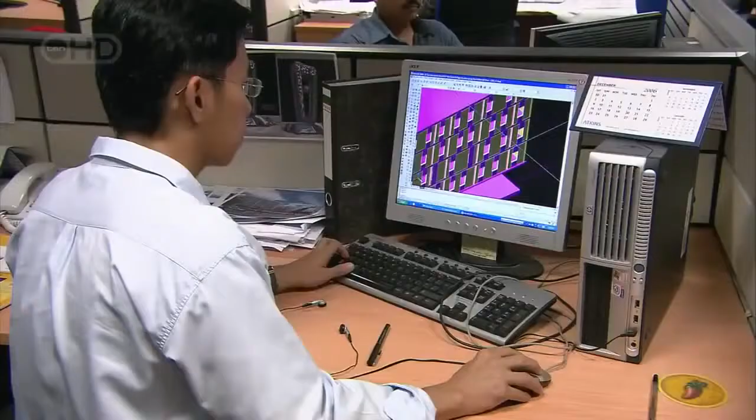The Sheikh's courage is clear from his choice of architects. A radical young team from Britain, brave enough to take up the challenge, but very short on experience. They are led by Chief Architect Tom Wright. We had an average age of 32. Not a grey hair between us. And none of us had gone over about 15 stories. I was quite staggered by the scale and the immensity of the project. Tom Wright and his colleagues have a reputation for innovative engineering, but they're more used to designing schools and offices.

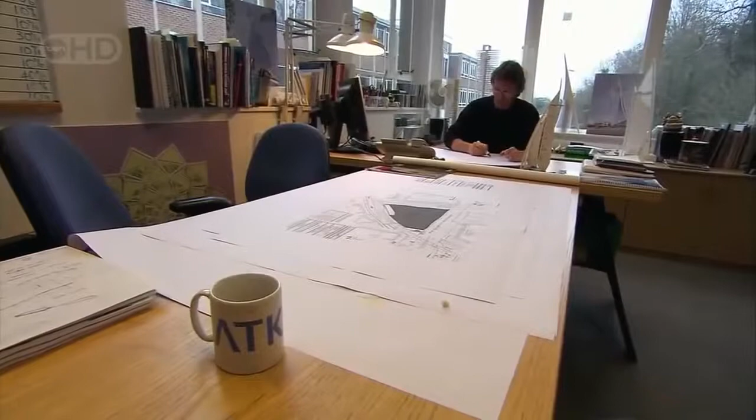But Dubai is a place where connections can make all the difference. Through a contact in the ruler's office, the team gets its break. Sheikh Mohammed agrees to a meeting and is so impressed with their initial concepts, he awards them the contract. Now Wright must turn his sketches into a design so remarkable, the building becomes a world-renowned landmark. We had many sleepless nights worrying that the building we'd designed wouldn't turn out to be at all iconic. Wright knows he must push his design to the limits.

A building only becomes an icon when its form is simple but unique. We decided that if you could draw a building simply with a few strokes of a pen, and it was instantly recognizable as not only the building, but the place, Dubai in this case, you'd created something that was iconic. So if you consider these buildings in the world, there are probably no more than 10 maximum that have actually achieved this status. Australia, Sydney Opera House. As with all these buildings, it's usually just the first couple of lines that actually make you know exactly where the building is. Paris. And you have to put a flag on the top.

Can Tom Wright and his team compete with the likes of Gustave Eiffel? This is a once-in-a-lifetime challenge. All the brainstorming pays off when Wright finally has his eureka moment. We were sitting there having a beer, watching the modern sailing yacht come out of the Dubai Offshore Sailing Club. You think of excitement, you think of exhilaration, and we went, hey, this must be the one. The form we came up with is very simple, and within a few lines, I think you can see that it has all the elements of an iconic building. It's simple and instantly recognizable.

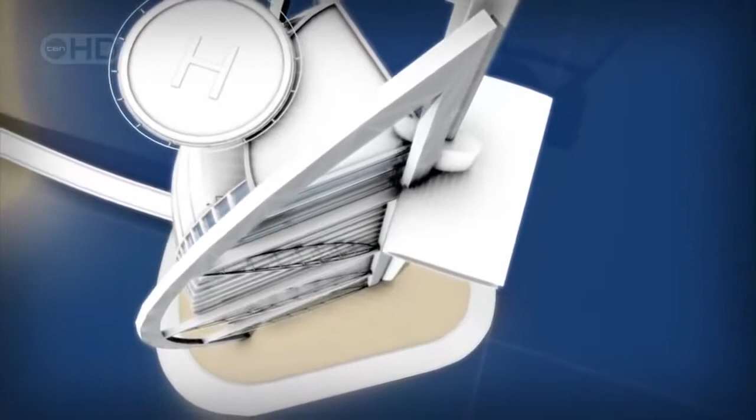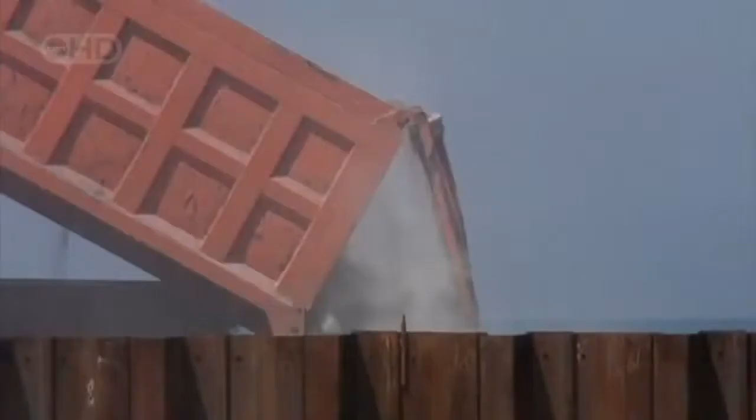By early 1995, the construction team is hard at work on Phase 1, building a low-lying island. But the inexperienced architects are about to get a taste of Dubai's extreme weather. April the 27th, a powerful storm known as a shamal sweeps across the Gulf, hitting the coast with a vengeance. A set of construction barges lie in its path. Each is laden with 10,000 tons of rock. The architects have planned for all weather conditions, but the storm's intensity still shocks Simon Crisp. We had 3 or 4 metre waves bashing onto the beach. To see the waves coming in like this was really quite a wake-up call for us.

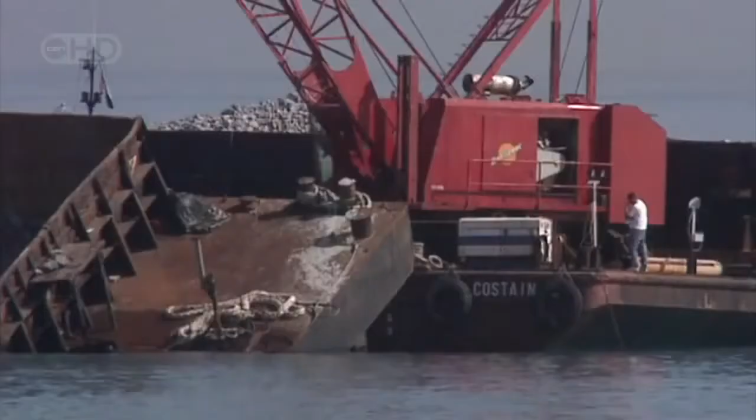One huge barge breaks loose and slams into the mainland. The team realizes the damage this kind of storm could inflict on their island hotel. We had a really graphic example of how powerful the Gulf of Arabia can be when it's angry. The architect's decision to expose their structure to these forces could have serious consequences. The engineers will have to struggle to produce a low-lying island capable of resisting nature's fury.

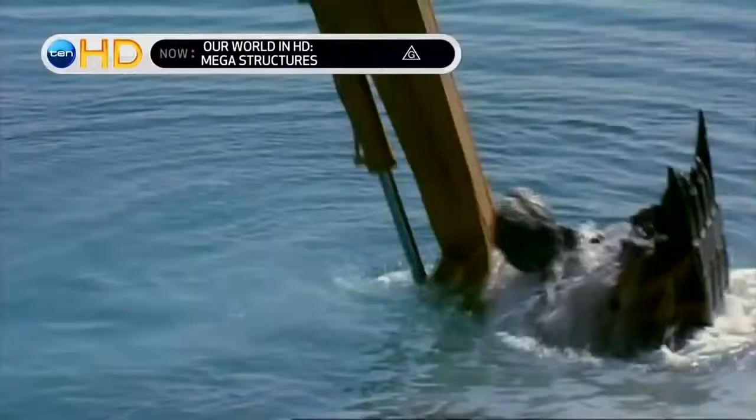The man-made island for the world's tallest hotel has hit a critical stage just 5 months into the build. Dubai's Sheikh Mohammed is depending on this project, the Burj Al Arab, to convert his country from oil producer to top-class tourist destination. But a debate rages over the island's height. Architect Tom Wright wants to make it low to give the impression of a sail rising out of the water. We argued a lot about the height of the island. From a design point of view, I wanted people to be close to the sea.

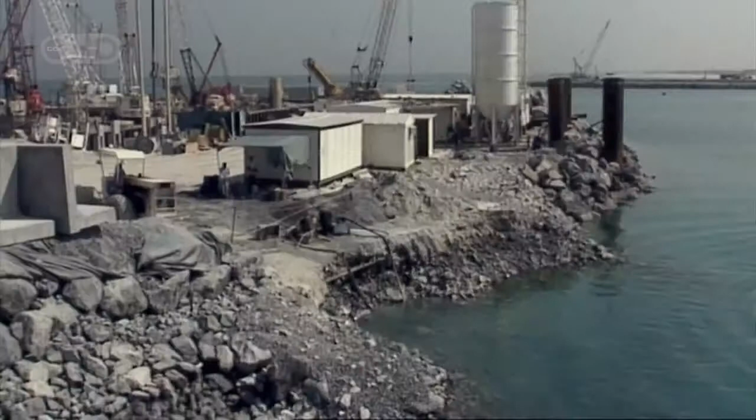From the start, he's gone head-to-head with engineer Mike McNicholas, who's responsible for the island's safety. So I wanted the island as low as you possibly could, skimming the sea. I'm coming from the other end, needed to make sure we were protecting the island. McNicholas's worst fear is that waves breaking over the island could damage the hotel or even drag guests into the sea. Initially, the engineers planned to build the island using rocks. They are available locally and the technology is proven. But Wright rejects this. A rock island would have to be far too large to repel the sea safely.

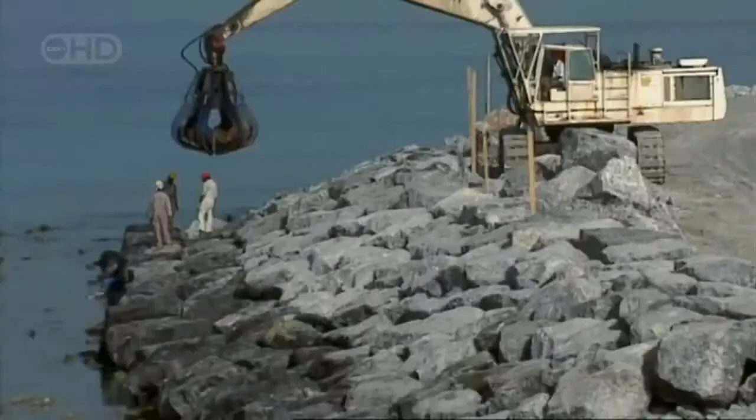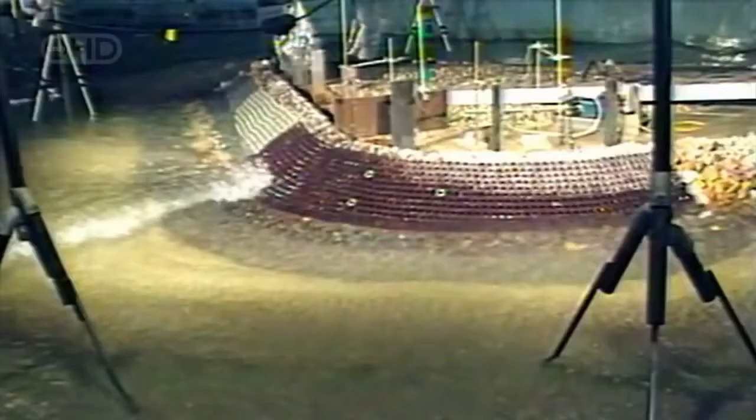To keep the island low, McNicholas experiments with pioneering concrete blocks designed to reduce the impact of waves. But no one in the Gulf has ever used these blocks before. I had to insist with the team that we carried out tank testing. It was the only way we were going to be sure that the island would be safe. These tests replicate the power of the tallest waves that can occur once in 100 years and send them crashing into a series of differently configured models. 3 weeks of testing prove the hollow blocks will work.

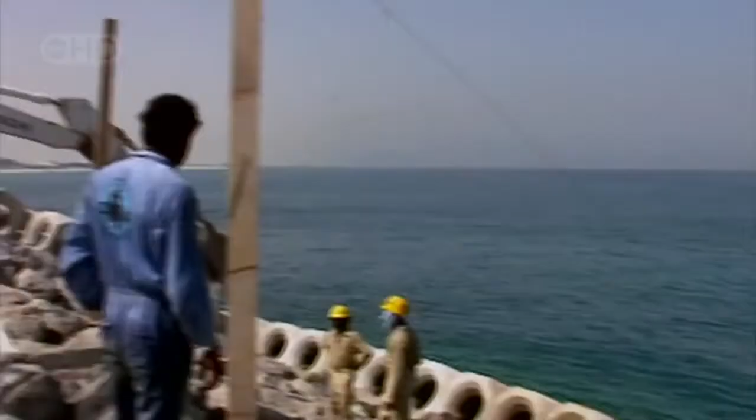The construction team builds the island with steep rock slopes, then covers them in concrete armor to absorb the force of the waves. These ingenious blocks work like a sponge. As the wave hits, the water passes inside the space and turns around on itself. The force is largely dissipated. With the engineers' help, architect Tom Wright has won his battle for a secure island that rises only 7.5 meters above the waves. Now the team begins the second stage of construction.

In the center of the island, construction workers drive huge lengths of steel 20 meters into the ground. This creates a triangular steel wall known as a cofferdam, which will become the outside of the hotel basement once they excavate the sand from inside.

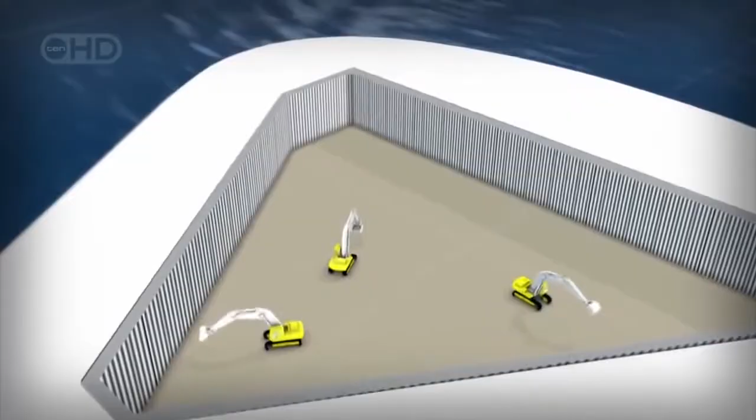But removing the sand could be dangerous. That was a real challenge for us. It's sleepless days and nights, 7 days a week. How we were going to stop the seawater coming into the structure, how we were going to stop the seawater coming around our structure from beneath and flooding it.

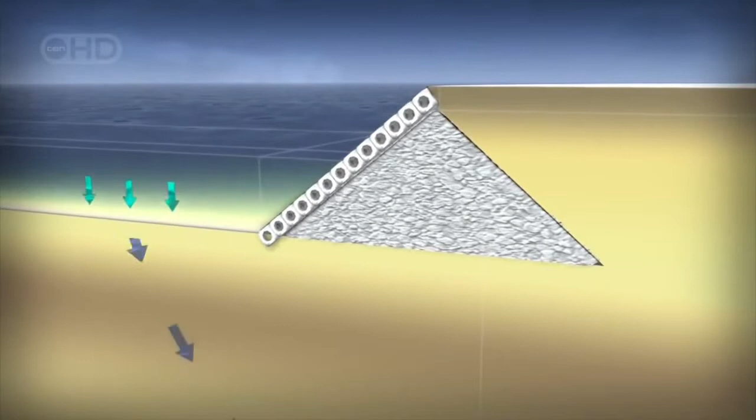The weight of the sea is a huge force on its bed. This pressure forces water through the sand and threatens to flood the artificial island from beneath. To keep the sea out, McNicholas injects liquid cement into the sand to seal off his steel wall from below. But as the sand is removed to form the basement, there's less and less weight to hold back the force of the sea. The cement seal is going to be tested to the limit.

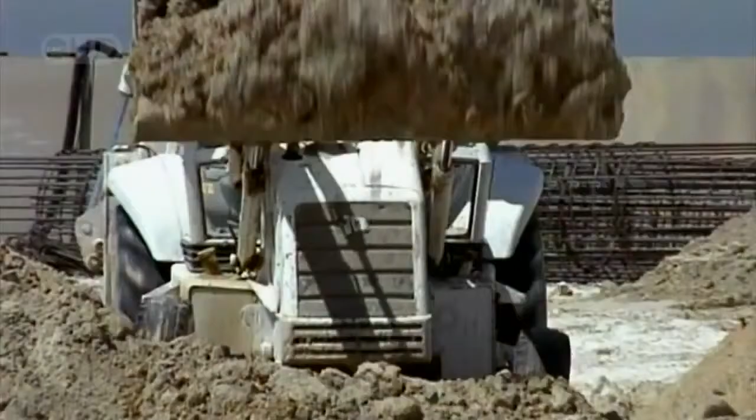In the worst case, the pressure caused by that water movement could have blown the whole bottom of the excavation like a champagne cork. If McNicholas's calculations are wrong, the excavation could be swamped, killing hundreds of workers. But he stands by his design. With the cement seal in place, the excavators begin to remove the sand.

As the man responsible, he's not going to let the workers face the risk alone. I felt I had to be one of the first guys down at the bottom of the excavation, looking up 10 meters above myself, thinking, each side of this cofferdam is 7,500 tons of sea pressure pushing in. When put to the test, both wall and seal hold firm.

And one of the probably proudest moments of my career was being stood on that excavation and looking around and seeing the steel wall there surrounding me and thinking, we are holding back the sea. My design worked.

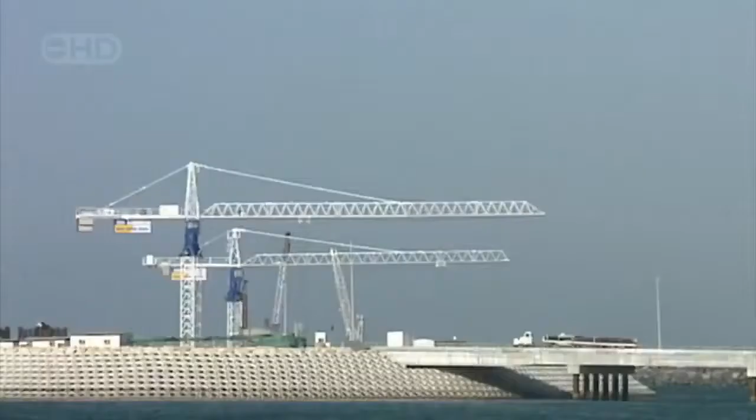November 1995. The artificial island for the tallest all-suite hotel in the world is now complete. The construction team starts phase 3 of this one-off project, the foundations. The support needed for any skyscraper is vast. But the location of the Burj Al Arab presents an added challenge. It had never been done before to build something like this on reclaimed land. I mean, we're talking about a 300-metre high tower on a man-made island in 6 metres of the Arabian Gulf.

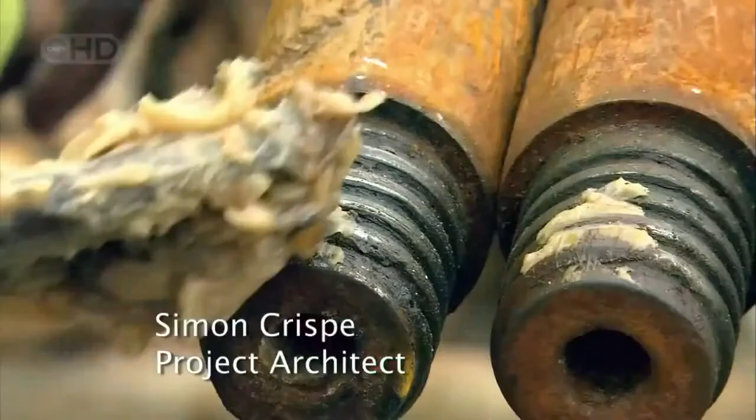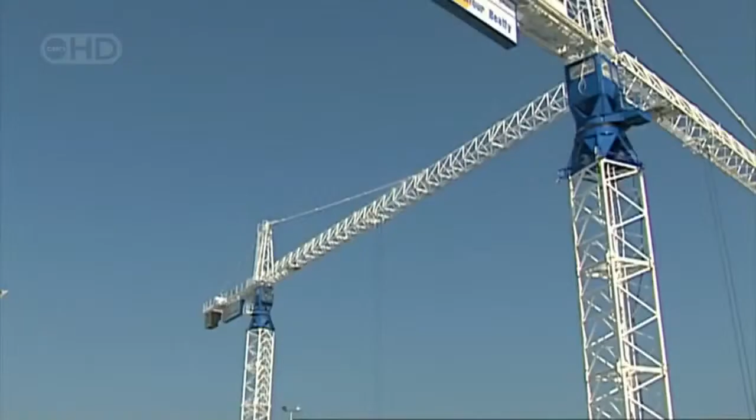The problems multiply when the results of earlier core tests reveal bad news. The team searching for bedrock drilled deep into the seabed. But even a full 180 metres down, there was no solid rock. This will make their job tougher, but the architects remain defiant. The average person would think we're crazy to build something like this on sand, let alone out in the water. How will this 300-metre structure stand firm against earthquakes and winds of close to 150 kilometres an hour when its foundations depend on nothing more substantial than sand?

On an artificial island 270 metres off the coast of Dubai, construction workers are preparing the ground for the tallest hotel in the world, the Burj Al Arab. But there's no bedrock beneath the site to support the foundations for a skyscraper. The architects have a plan. They want to support the Burj using steel-reinforced concrete foundation piles drilled deep into the sand.

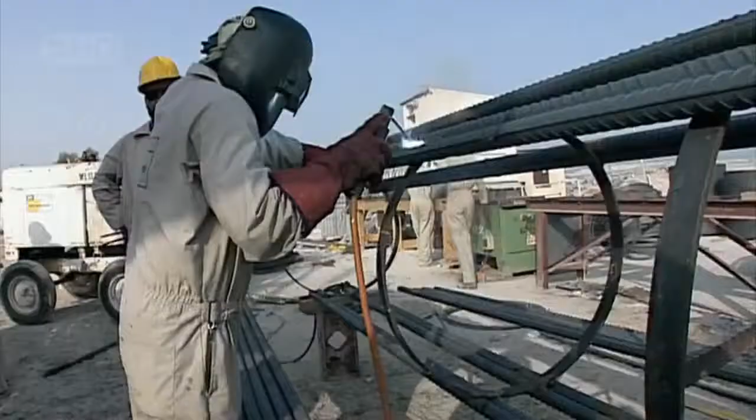So, what's to stop the whole structure from just sinking? They are relying on an effect known as skin friction, the resistance that stops two rough surfaces slipping past each other. Skin friction is all about the contact between the sand and the surface of the pile. And the longer the pile, the further in the ground it is, the greater that effect. And I'm going to demonstrate it now by whacking it in.

You'll see it starts to move quite quickly with the first few impacts. Now it's starting to stiffen up a bit, even though I'm not hitting it any harder or any softer, and the skin effect is starting to really kick in here. Once the friction between the post and the sand around it equals the load of the hammer, the post comes to a halt.

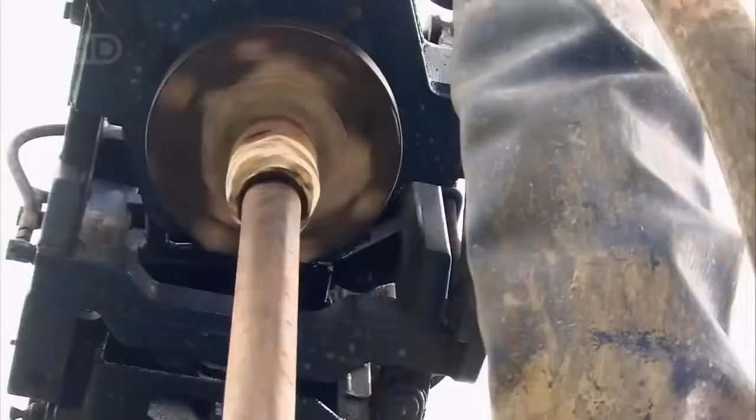The scheme will only anchor the Burj if the sand is compacted enough to create resistance around the building's piles. The drillers pack sand samples into sealed containers and send them off to be analysed. If the results show the sand is too loose, then support on the piles anchoring the building could suddenly fail.

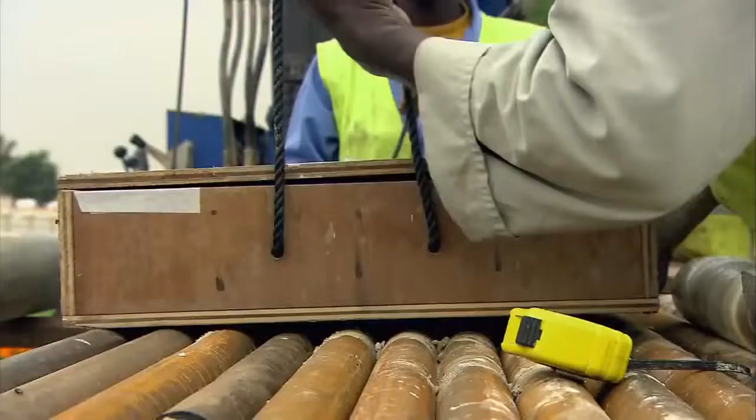The geography of Dubai gives everyone reason for concern. It lies within range of a major fault line, so this soaring megastructure could be vulnerable to earthquakes.

In June 1964, a 7.5 magnitude earthquake hits Niigata in northern Japan. Because the area is built on sandy silt, the tremors flip over entire apartment buildings. This isn't normal earthquake collapse. It's a devastating phenomenon known as liquefaction.

As grains of loose sand shake, they fill up any air pockets and compact, taking up less space. The ground stops behaving like solid earth and acts like a liquid. On shifting sand, any building could simply topple.

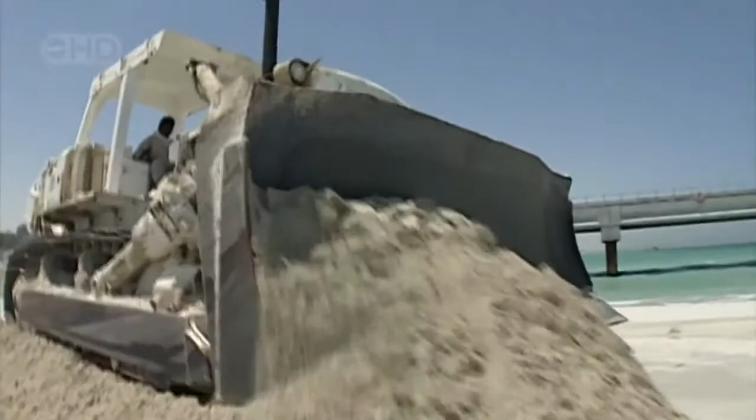When the results of the drilling tests return, it's good news. Deep beneath the site, they find compacted and calcified sand. Liquefaction is not a threat. But will the foundations be long enough for the skin friction to hold them firm? We weren't going to take any chances, and we extended the piles by another 8 metres.

CRISP specifies foundations over 20% longer than originally planned. These 250 concrete piles have a combined length of 10 kilometres, 35 times as long as the towering hotel they will support.

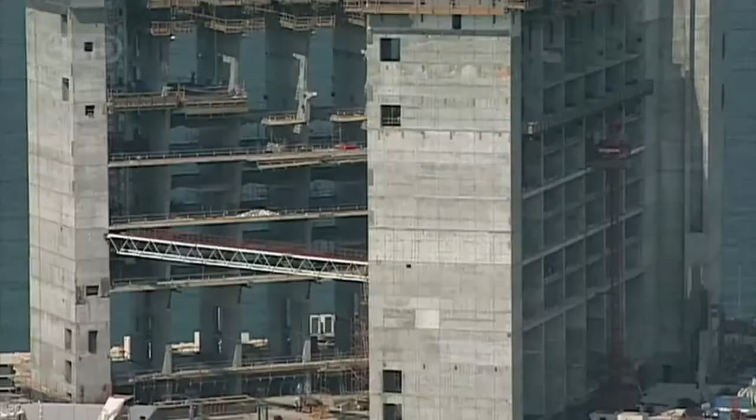One by one, the engineers are solving the challenges thrown up by this extraordinary structure. But in 1996, they brace themselves for a new set of obstacles as Phase 4, the construction of the hotel itself, begins. This building had to stand up to the worst that the Gulf could throw at it. The hotel itself has slender concrete walls, not capable of withstanding the elements alone.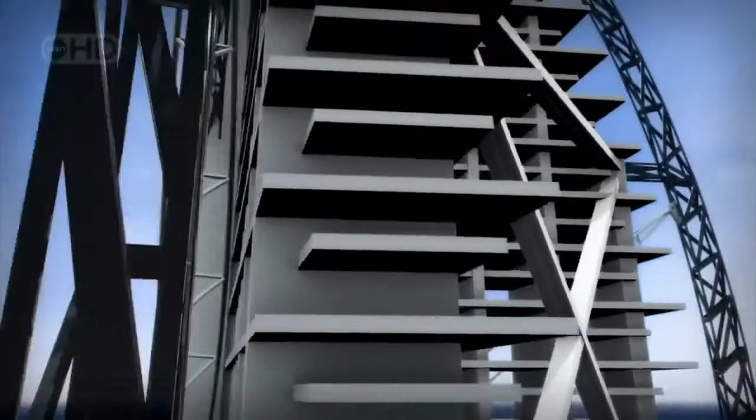To hold them firm against high winds and earthquakes, the architect devises a visually stunning solution. A gigantic steel structure outside the main building, known as an exoskeleton. A series of vast diagonal trusses tie two huge steel bows to the concrete core at the back of the building. Wright's design will make the building unique.

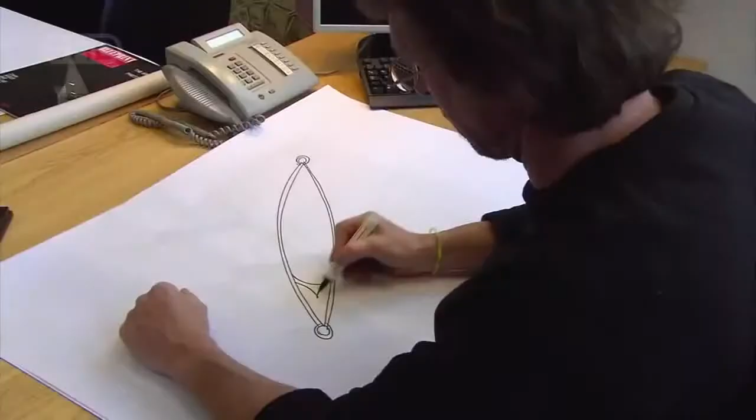But his giant diagonal trusses will make life hell for Anthony McCarter, the engineer who has to make them work. Those trusses gave me 4 months of heartache, sleepless nights, worries, anxiety. They must be incredibly strong to tie the exoskeleton together. But aesthetics are just as vital. It was critical that these diagonals were very, very elegant and also very beautiful as they're so visible.

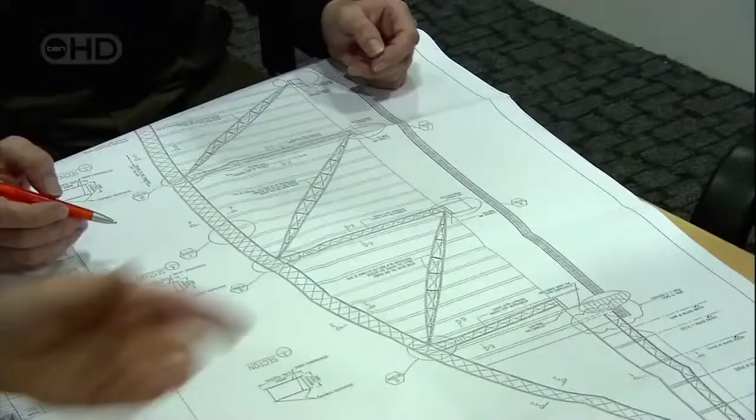This building has to wow the world and make Dubai a must-stop destination. Wright's not about to compromise. I used to go to Tom with option after option. I remember one particular occasion where I had 7 options and he went, no, no good, no good, no good. Eventually, McCarter finds a form that works structurally and is graceful enough to fit Wright's vision.

But this in turn causes nightmares for Malcolm Murphy, the chief contractor. It's okay for the architect to draw pretty pictures, but we have to build it. He finds a factory just 15 kilometers from the construction site capable of welding the huge diagonals. Each one is longer than the Airbus A380 Super Jumbo and heavier than 20 double-decker buses.

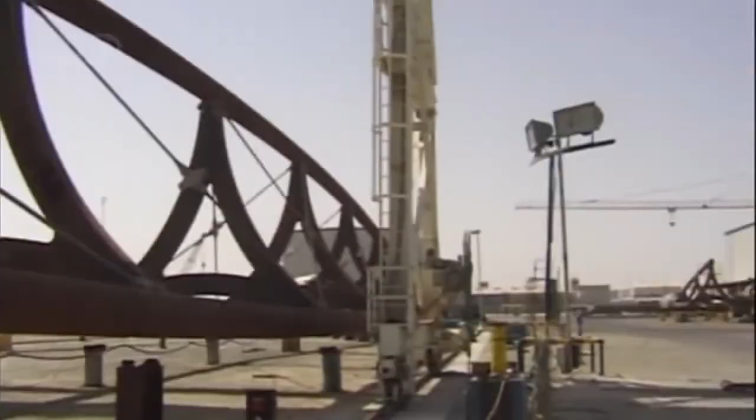Welding these complex forms in the factory is the easy part. Transporting them to the site is not. With each truss weighing in at 165 tons and reaching a staggering 85 meters in length, it's no easy task. And the challenge is to do that. It's just unbelievable. No one has ever transported anything this size before in Dubai. But Murphy's not going to be beaten.

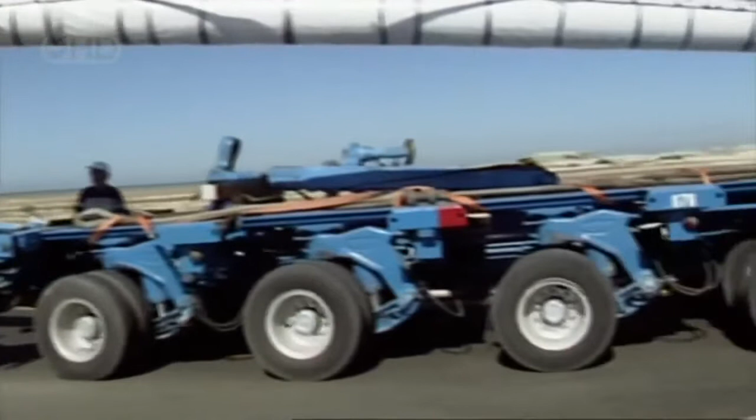He brings in one of the world's largest heavy lift transporters, a beast with a total of 80 wheels. It makes the slow journey to the construction site at an average speed of around 6 kilometers an hour. Police must close roads and remove traffic lights to allow this convoy through. When they finally reach the site, the contractors face their next hurdle. These 165-ton beasts have to be lifted into position.

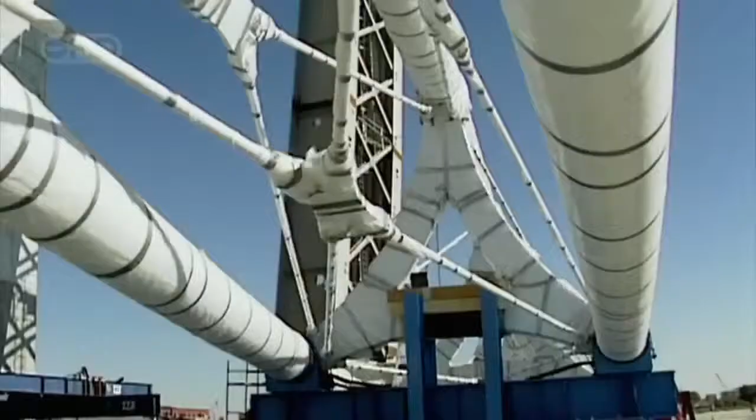The architect refuses point blank to position these things in 3 pieces, which we wanted to do originally. And he said, no, aesthetics, I'll not let you weld up there. He has to find a way to lift the trusses in a single piece to a height of almost 200 meters, twice the height of the Statue of Liberty. We had to go away and think of an idea how to actually lift these monsters up. We had 3 big monster cranes in there, and even they weren't big enough to lift the diagonal trusses.

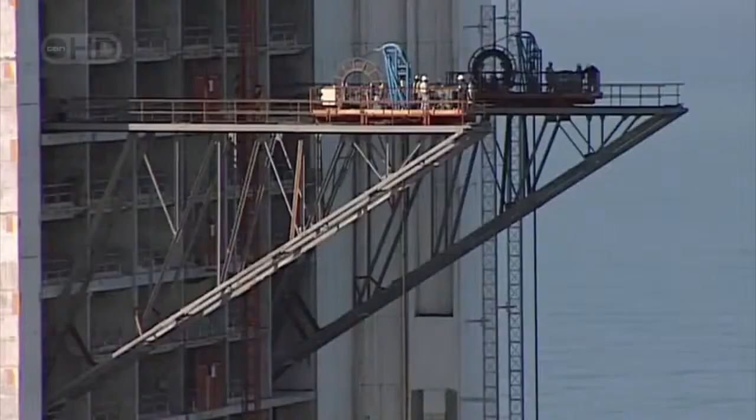Murphy must look further afield for a solution and brings in specialist lifting gear from Singapore. His team sets up winches, like those used on offshore drilling rigs, high on cantilever frames 15 meters from the building. Cables with a breaking strength of 225 tons are attached to the end of the truss. I can assure you we were very, very nervous that morning when we lifted the first one. 30, 40 guys had sleepless nights that week, getting ready for that first lift.

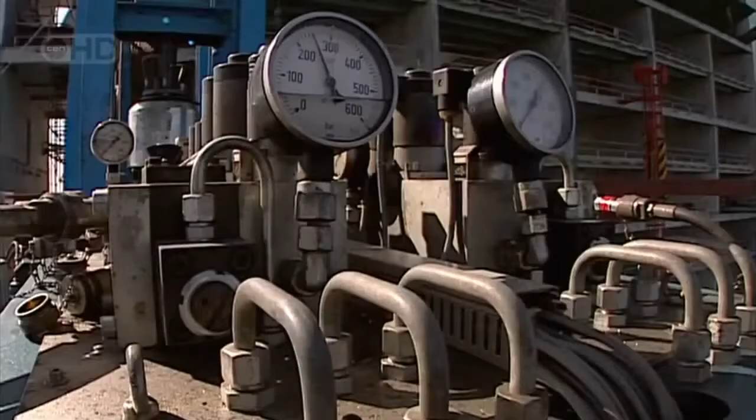The 2 massive winches take up the strain and then painstakingly raise the diagonal truss little by little up the side of the building. It's all going to plan. Murphy and his team have solved the lifting dilemma, but these trusses have a sting in the tail. They need to fit into place with pinpoint accuracy. But Dubai's climate means temperatures can vary by as much as 14 degrees in a single day, and this will make the trusses expand and contract dramatically. The problem's known as thermal expansion.

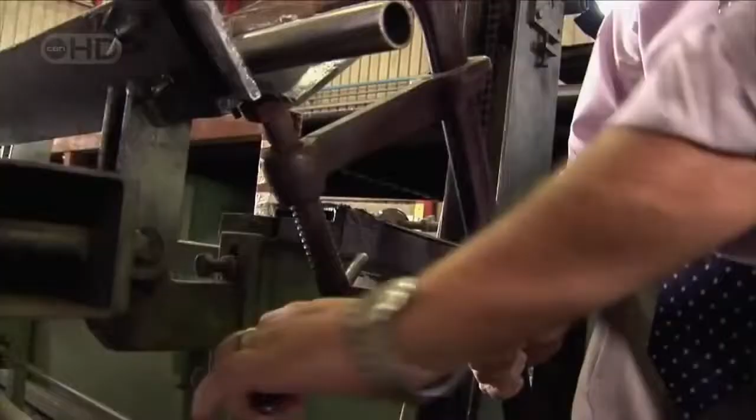The steelman's nightmare in the desert, working 50 degrees C. Steel expands in the heat and contracts when cold. Okay, chaps, light up. We're actually going to heat the steel up now, which is going to give you an idea of what temperatures we're working in the desert.

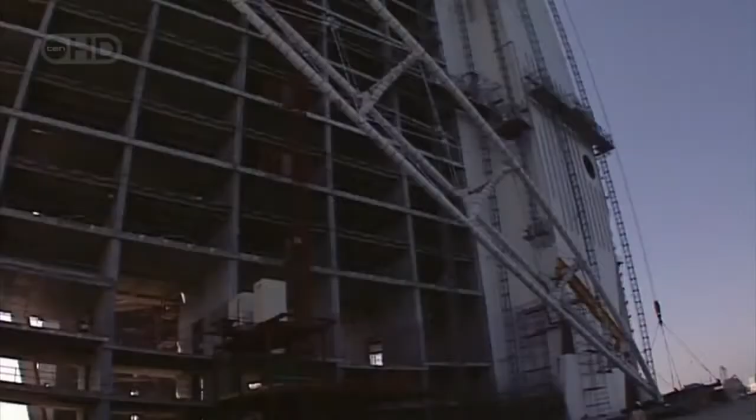Heat makes the steel molecules move faster and further. And this 15-meter tube actually grows in length. The difference is visible. What did I tell you? Steel does expand with the heat. The diagonal trusses on the Burj Al Arab could expand and contract by a full 5 centimeters over a 24-hour period.

They will never fit their precise point in the framework without an ingenious solution. The engineers thought about it, the structural fabricators, the steel fabricators, the architects, everybody thought about it, and it was actually one of the architects came up with this great solution. On the frame of the structure, the fixing bracket contains a vast washer with its hole offset from the center. This swivels until it lines up with the hole in the diagonal truss.

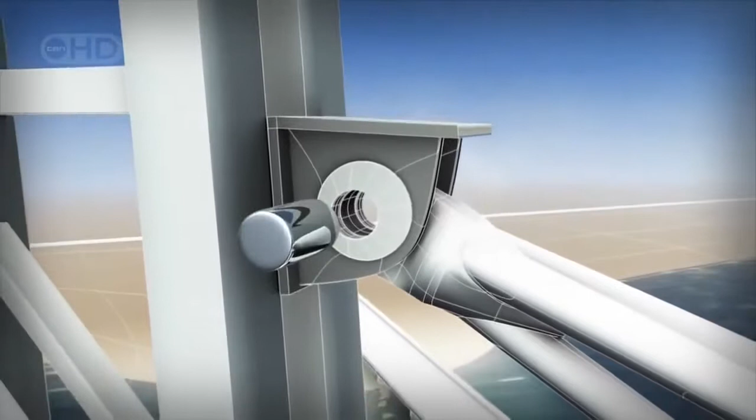Then, the cast steel pin, about 30 centimeters in diameter, is inserted through both holes, locking them together. This clever device buys the team the crucial 5 centimeters of play they require for the installation, and the truss is now fixed securely in place. When we got that pin in, we had those champagne corks flying. It was just unbelievable. But there's precious little time for celebration.

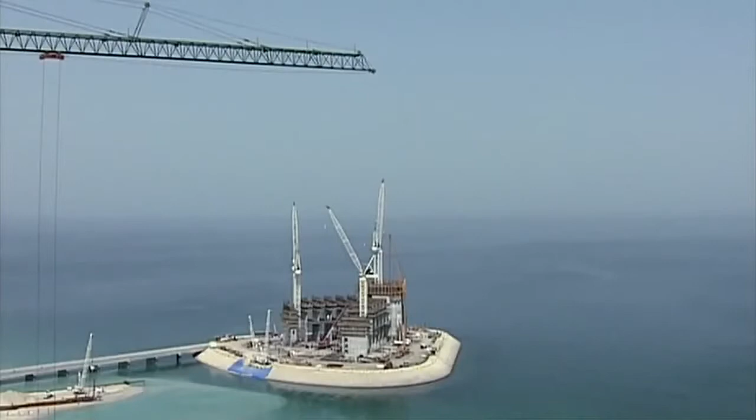The first VIP guests will arrive before the millennium. This leaves the team less than 36 months to complete the entire project. Sheikh Mohammed's vision for the Burj Al Arab meant that it was needed yesterday. January 1997. A colossus is emerging out of the Arabian Gulf. The Burj Al Arab is to be the tallest hotel in the world, the last word in luxury and a proud symbol for Dubai.

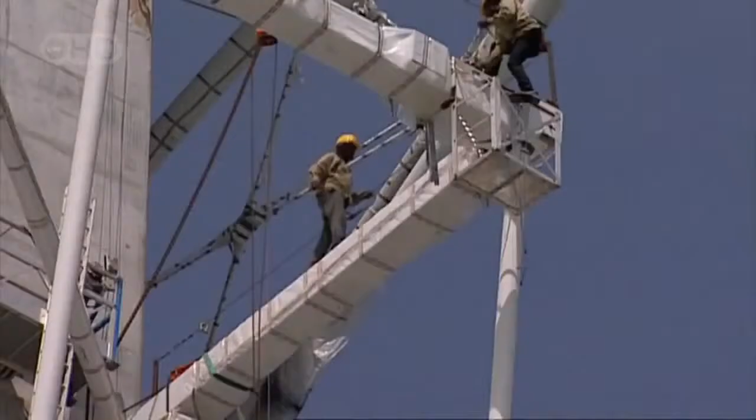Architect Tom Wright wants the building to be beautiful. The steel sections of the exoskeleton that will support it must be as minimal as possible. The view from these $2,000 a night suites will have to live up to the price tag. When you're in the suite, looking through the windows, they are right in front of you, so they have to be exceptionally well detailed and well put together.

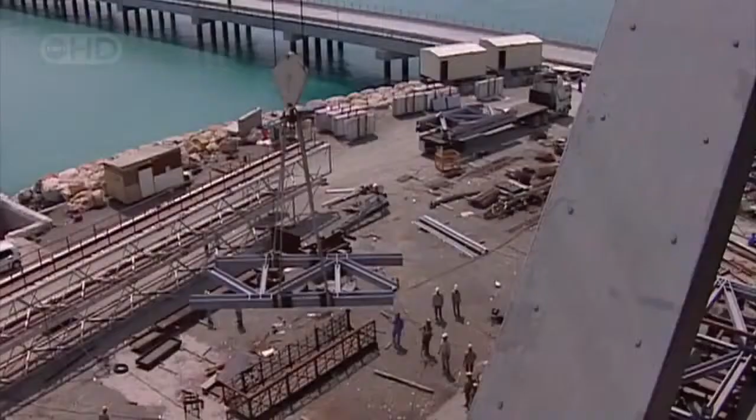But this creates a dilemma. If Wright makes the exoskeleton too light, the wind's force at 300 meters above the Gulf could shake the building apart. Too bulky, and the elegant form of his sail-shaped structure is ruined. Once again, Wright and the engineers, who must make his hotel safe, are on a collision course. When you're designing a building that is taller than the Eiffel Tower, and you've never done one before, you want to make sure that you've got it right.

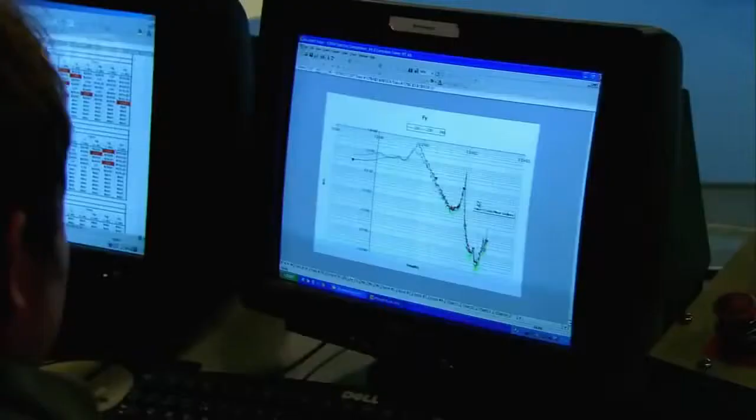This structure is so unusual. For the first time in Dubai's history, engineers decide to do tests in a wind tunnel. Wind engineer Volker Butgereit knows the Burj Al Arab is one of a kind. Before this building came along, most of the buildings in the Gulf were fairly orthodox shape. They were square, they were rectangular, they were nowhere near this scale. So doing a wind tunnel test for a building in those days in the Gulf was almost outrageous. But for this extraordinary structure, it's essential.

The wind tunnel simulates the wind effects of the Gulf around this 1 to 50 scale model. This building has seen some pretty severe loads, almost twice what it would be seen in London. We measured suctions which were the order of a weight of a car hanging off, trying to suck the panel off the building. So that's quite something. The wind tunnel throws up results that could threaten the entire exoskeleton.

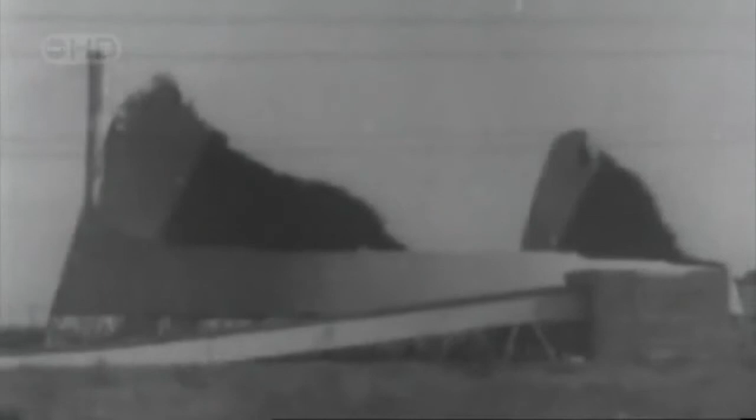When we first saw the design, there was immediate concern about vibration due to something called vortex shedding. Vortex shedding is an engineer's nightmare. Certain wind conditions blowing over sharp edges on the steel structure can create miniature tornadoes. These set up dangerous vibrations that can shake a building to destruction. Which is exactly what happened to these massive cooling towers in Ferrybridge, Northern England, in 1965. The engineers must find a way to protect the Burj Al Arab.

The simplest solution is to change the aerodynamic shape, but that upsets the architect. The architectural idea of the exoskeleton structure is, when you look at it, the very essence of the building. If you take it off, it's just another building. If you put the exoskeleton structure on, you know, you have an icon.

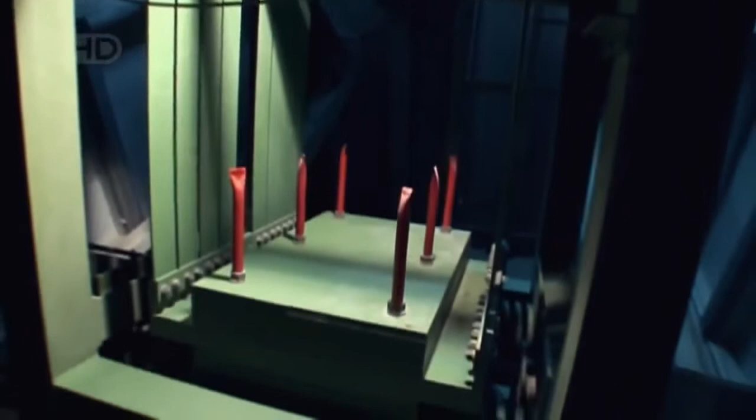The engineers need to think again. This is classic vortex shedding. We realized we had to come up with something clever that was not visible, but somehow reduced the motion. They turn to an ingenious hanging weight called a tuned mass damper. These are installed at vulnerable points in the exoskeleton.

When the wind blows and vortex shedding starts to create dangerous vibrations, the 5-ton weight will swing instead of the structure and damp down the vibrations to well within safety limits. 11 of these systems are fitted from the top of the 60-meter mast all the way down through each of the steel bow structures. These dampers safely cancel out the threat.

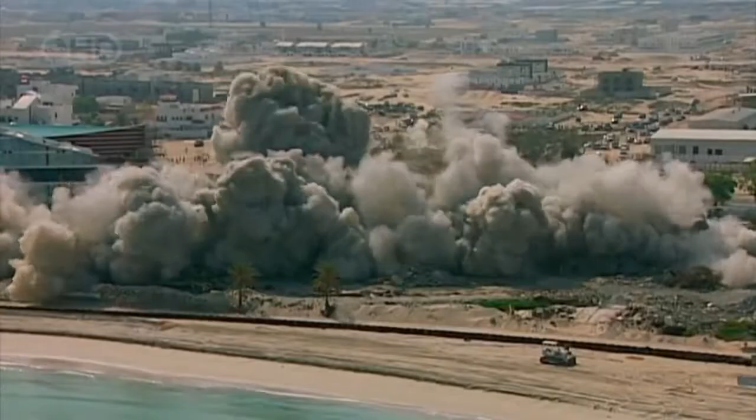June 1997. Dubai is reinventing itself as the luxury tourist destination. This old hotel bites the dust as the Burj Al Arab, the symbol of the new Dubai, approaches its final form. Just 30 months before the deadline, the crew begins constructing the toughest engineering challenge. Sheikh Mohammed wants the building to amaze. So the design calls for a restaurant that looks as if it's suspended in the sky.

I like the idea of the visitor sitting out in space, looking across the view towards the Arabian Gulf and Dubai, and sort of almost floating up in the clouds. The whole idea of hanging out over space would give you a dining experience pretty unparalleled. The Al Muntaha, or Ultimate Sky View Restaurant, will soar 200 meters above the sea and project nearly 27 meters out on both sides from the building's narrow central core.

Once again, Wright's throwing down a gauntlet to structural engineer Anthony McCarter. Can he secure this eccentric wing-like structure with no visible means of support? When Tom first showed it to me, I must admit I thought he was crazy. This room is actually the size of most buildings, and Tom decided that he wanted to take it and stick it outside of the centre of gravity of the supporting structure. So there it was, dangling in the breeze with only the structural engineer to hold it up. And if the engineers get the calculations wrong, the whole thing could tumble 200 meters to Earth.

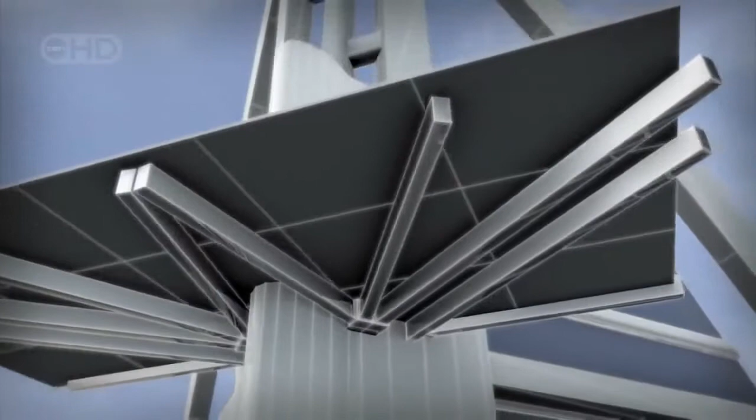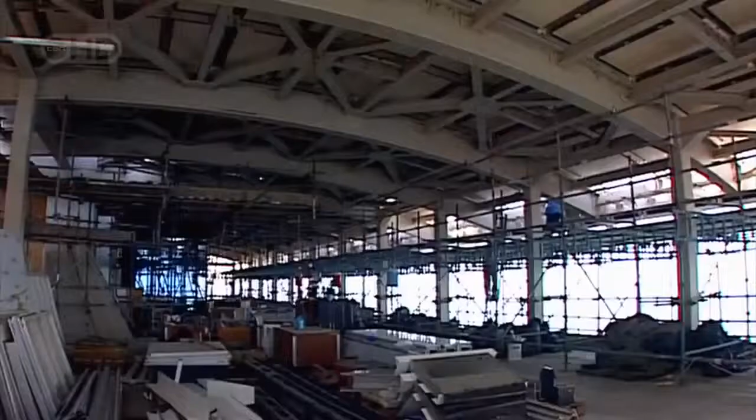McCarter finds a solution to the pull of gravity that pushes conventional engineering to new heights. In the concrete core at the back of the building, he casts a series of steel brackets known as embedments. 10 enormous steel girders radiate off them up to 1.6 meters high. These beams form the base of the rigid steel floor. The wing-like exterior can be attached to it, and then the entire restaurant is enclosed in aluminium and glass. This gravity-defying structure will survive winds of close to 160 kilometers an hour. It's an engineering triumph.

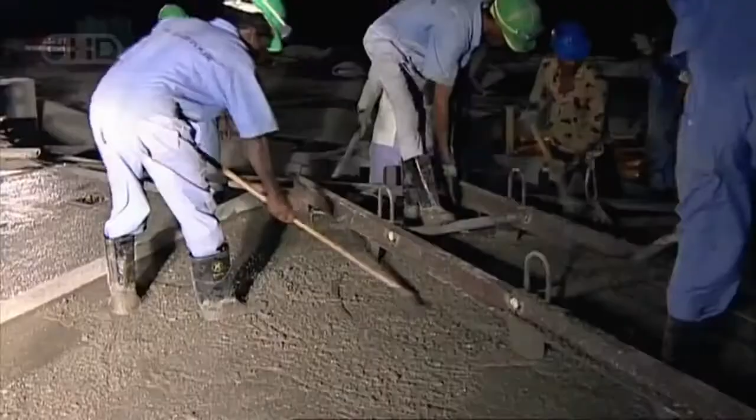But they are just 4 years into the 6-year program. No one can afford to take their foot off the gas. The program was relentless and challenging. 24-hour working, 6 o'clock site meetings in the morning, every morning. You live, sleep, breathe the building. The challenge really was on, can we design it and finish it by the original program?

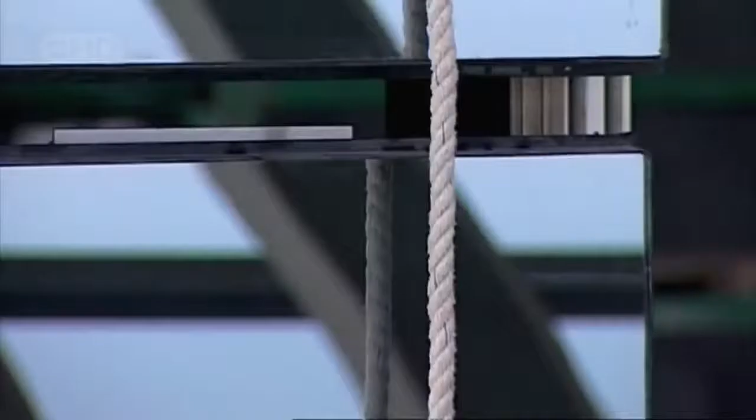The Burj Al Arab is due to open in time to celebrate the millennium, just 2 years away. The world's media are watching to see if the hotel will be the masterpiece the Sheikh promises, and if the team can complete it on schedule. The only way to deliver on time is to start the interior decoration long before the exterior is finished.

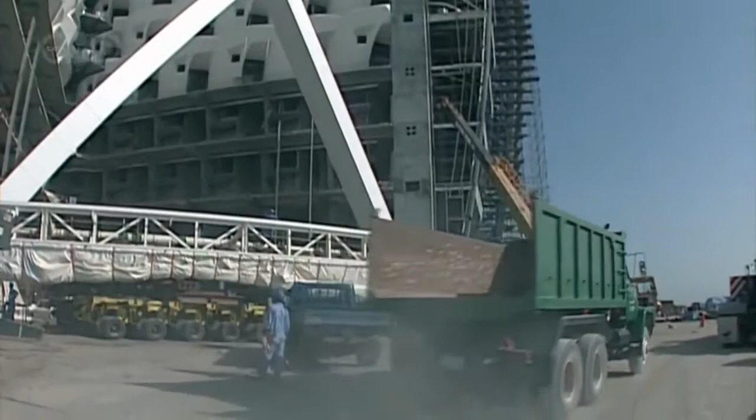In a temperate climate, this wouldn't be an issue, but humidity in Dubai reaches 100%, and temperatures can soar to a scorching 49 degrees. These conditions simply won't allow the team to fit delicate finishes like gold leaf, silk and carved wood. If we'd started to put materials that were susceptible to moisture at that time, they would have just fallen apart. To make the deadline, the contractors need to air condition this giant building site and bring the temperature down dramatically.

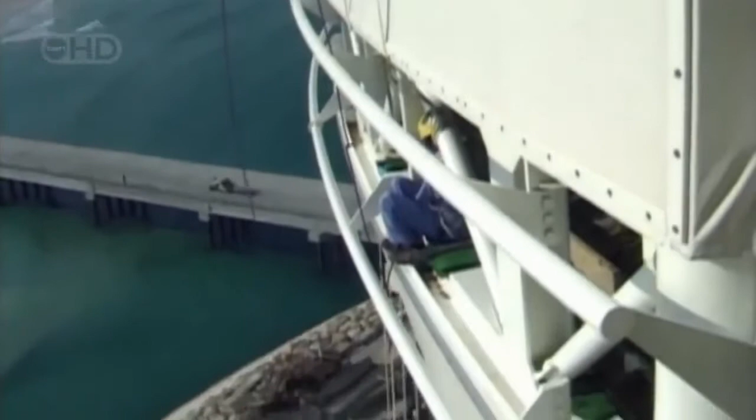The first step is to enclose the building by installing the final wall, Wright's iconic white sail. But it's going to be tough. When we first proposed the idea of the fabric sail wall, there was a lot of scepticism, and people thought that it couldn't be done. They stretch woven glass fibre sections between huge horizontal beams. The surface is pre-coated with Teflon to resist dirt and sand. The result notches up another first for the Burj, the largest fabric wall anywhere in the world.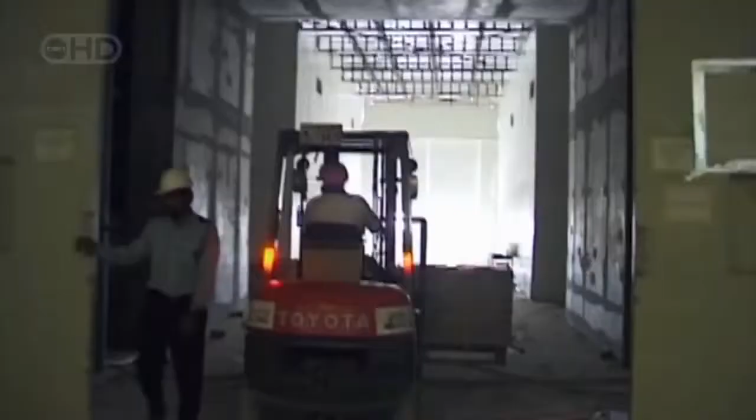The reflective properties of the white sail will help keep the temperature down. But the contractors still need to find a way for trucks to enter the building without allowing in the desert heat. The solution is to install a huge airlock. Trucks drive in, the vehicle pauses as the doors close behind it. A second set of doors then open, and the vehicle moves out of the building.

The airlock and the sail wall now seal off the building. But cooling a space this large during construction could create a major setback. This unique structure now boasts the world's largest atrium, soaring to an amazing 180 meters.

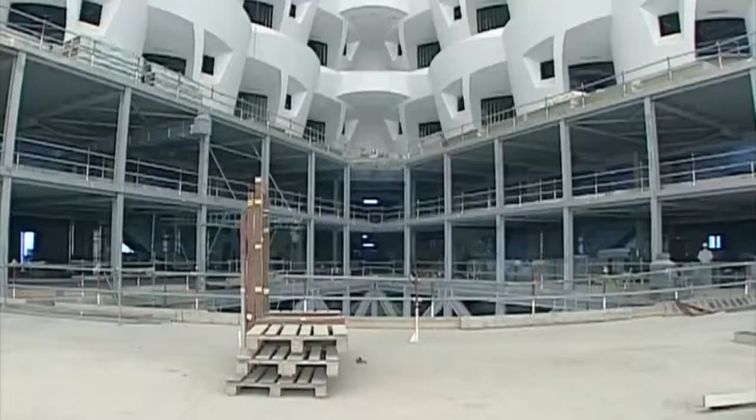All this warm air can hold far more water vapor than cold air. If they cool this hot, humid environment too quickly, they will create uncontrollable condensation. We could have had a rain cloud form at the top of the atrium and create massive damage to the interior design. The only way to avoid rain clouds will cost valuable time.

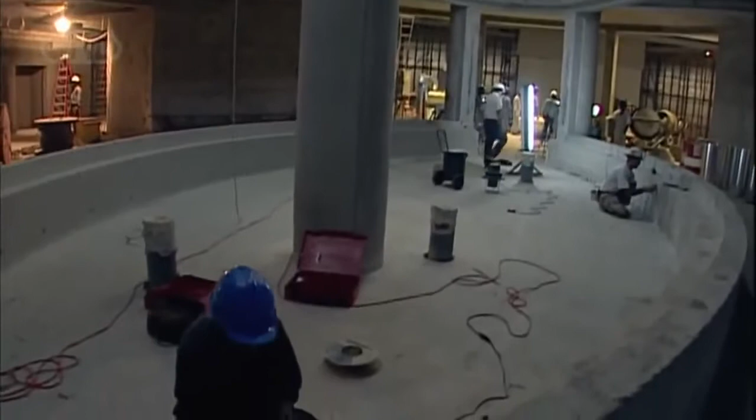The contractors switch on the giant cooling system and bring the interior temperature down steadily by less than 1 degree a day. Given the schedule, it's painfully slow. We started to cool the building down in June 1998. By December 98, it was pretty well down to temperature. At last, the interior decoration can begin.

But the hunt for a designer who can create interiors worthy of a sheikh causes further delays. Khuan Chew, who's already worked for the Sultan of Brunei, knows exactly what it takes to satisfy royalty. It's great news when she agrees to take on the most luxurious hotel on the planet, with its daunting 202 palatial suites and the 180-meter atrium.

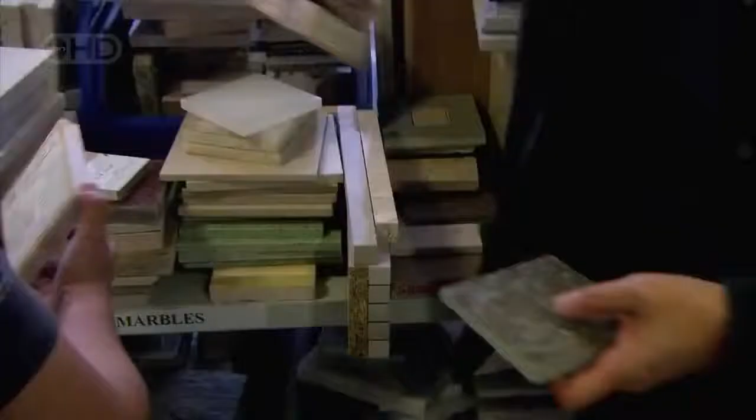But she has just 24 months from design to completion to be ready for the guests booked in for the millennium. I had a very, very tight program. So what we did was that the entire office, all 50 designers, just dropped everything else. Solidly, we just worked on the Burj Al Arab.

She not only faces a frantic schedule, Sheikh Mohammed is expecting her to amaze the world. The brief basically asked us to design something that's never been designed before, and that will never be designed ever again. Khuan Chew and her team pull out all the stops and begin to produce interiors they hope will match the Sheikh's ambition. But as they struggle to meet the deadline, another more severe problem comes up.

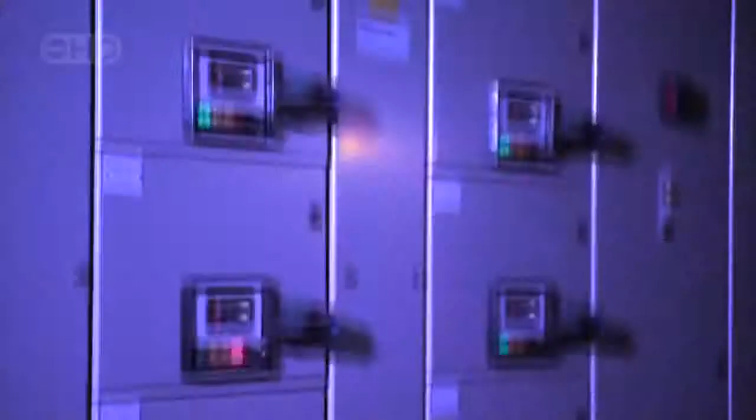The Sheikh wants to offer guests every conceivable electronic gadget in their suite. This new requirement could have dangerous consequences. A new member of the team is suddenly in the hot seat. Electrical engineer Rob Roos faces the biggest challenge of his career. There was a total redesign or a total change in the interior design, and that imposed overnight almost a 50% increase in the electrical load of the building.

The Sheikh's new plans mean each suite requires an enormous 14 kilowatts. That's 8 times the load of a normal European house for every suite. With 202 suites, that's roughly enough electricity for a town of over 6,000 people. The hotel will have electric curtains throughout, 52,000 lights, most of them on dimmers, and over 5,000 kilometers of electric cable.

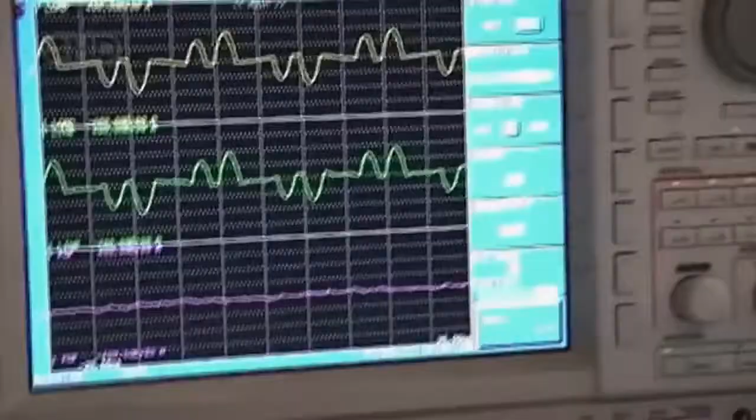All these electronics can scramble the waveform of the electric current and create a problem known as harmonic distortion. This can melt the sheathing around live cables and cause a raging fire. That was a situation which was just totally unacceptable. We had to deal with that.

The people of Las Vegas know just how lethal a hotel fire can be. November 1980. In the city's MGM Grand Hotel, a pair of electrical wires short-circuit. This causes a blaze that wreaks destruction. 85 people perish in this real-life towering inferno, and over 700 are injured. It's one of the worst hotel fires in history, all caused by a simple electrical fault.

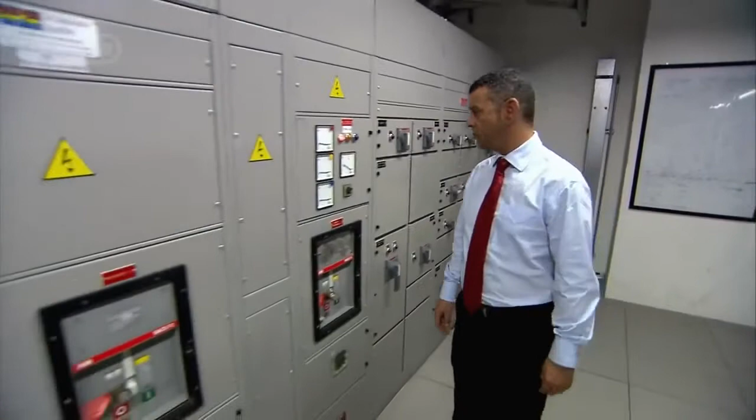Roos needs a solution to the fire risk, and fast. Obviously, the hotel was under construction. There were some fairly heavy deadlines to try and get the hotel finished and opened, and this was a major change. His response takes electrical engineering to a new level. He devises a harmonic filter system.

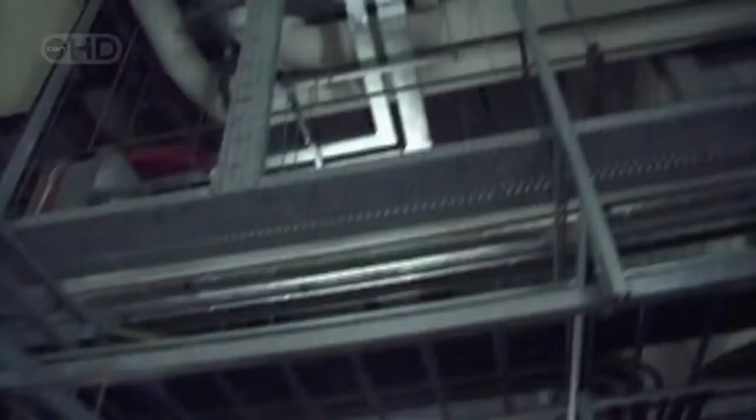First, it detects the electronic distortion, then it sends a current that's the mirror image to cancel it. It's called antiphase and works like noise-cancelling headphones. He installs his filters on key floors, and at the point the electricity enters the building. No one has ever attempted a system on this scale before. This was the largest active filter installation of its kind in a building like this anywhere in the world. A world-class solution for a world-class megastructure.

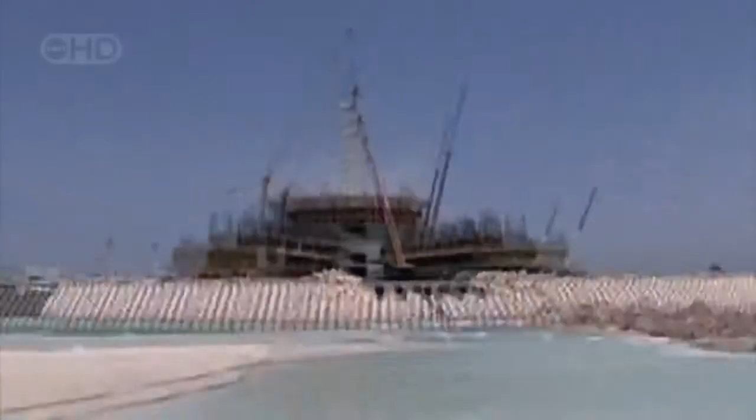The team constructing the Burj Al Arab can claim a string of groundbreaking achievements. They build the first artificial island off the coast of Dubai, construct the tallest atrium in the world, enclosed by the largest fabric wall ever built. And with the mast finally in place, this structure, for now at least, is taller than any other hotel on the planet.

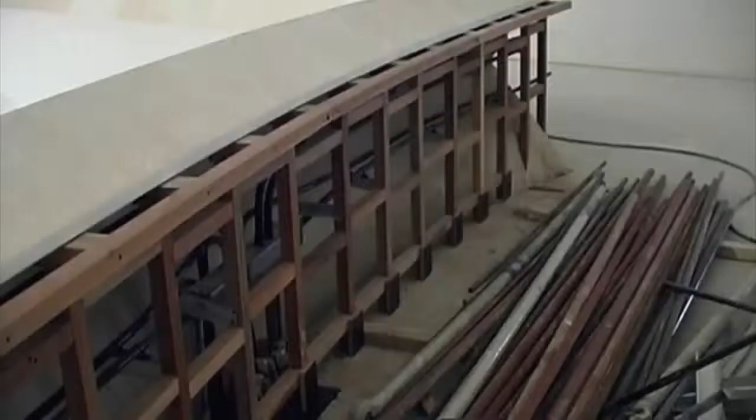Now, 5 years into the project, the team reaches an important milestone. The iconic exterior is almost complete, but the interior decoration of the world's most luxurious hotel is seriously behind schedule. This stage has always been a race against time. Now Sheikh Mohammed is about to send the design team into a tailspin.

Dubai, April 1999. The world's tallest and most opulent hotel is approaching completion. Everyone is rushing to finish the hotel, ready for the millennium deadline. Interior designer Khuan Chew is still operating in overdrive. Christmas was cancelled, Easter was cancelled, bank holidays were cancelled. We basically made 50, 60-hour weeks. Her brief from the Sheikh is to shock, to innovate, to amaze the guests with a modern Arab palace.

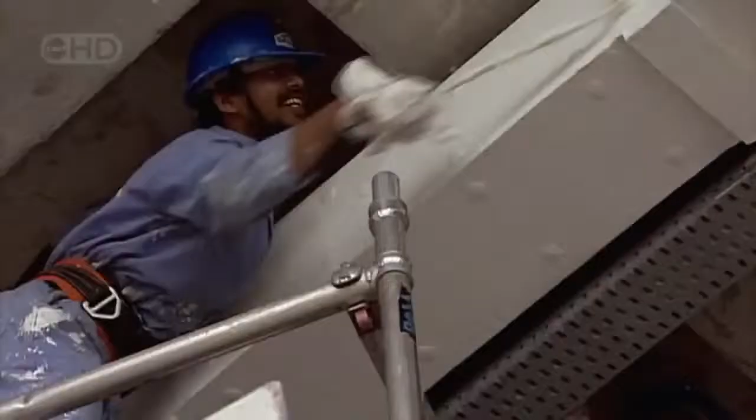And she delivers in spades with over 24,000 square meters of marble from Italy and Brazil, the equivalent of nearly 3 soccer pitches. Over 8,000 square meters of 22-carat gold leaf give the desired impression of luxury. And she completes the appearance of total indulgence with crystal chandeliers, woven silver and velvet. But for the world's largest atrium, Khuan Chew makes a radical decision. She goes minimalist. She lets the complex architecture speak for itself by painting it all white. The interior decoration is almost back on schedule.

Then comes the moment of truth. Sheikh Mohammed arrives to examine her work and pass judgment. The man behind the whole project is delighted with the ornate styling of the luxury suites. But that's where the good news ends. I was summoned and said, when are you finishing off this atrium? I said, well, it's nearly done. Unfortunately, the feedback was no, where's the color?

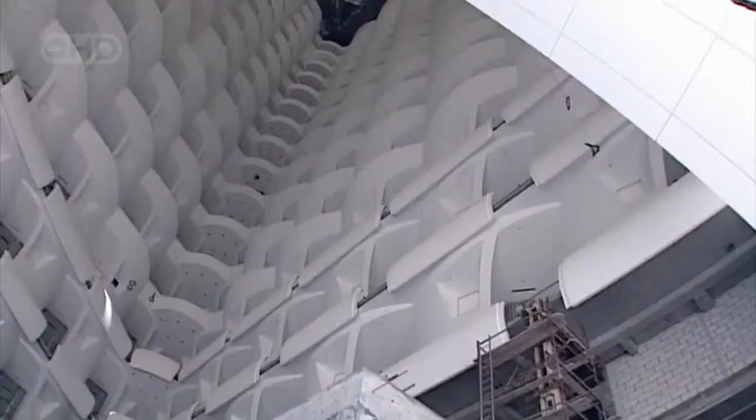The Sheikh completely rejects the white styling of the atrium. It's just too plain. Not exciting enough, not bright enough, not colorful enough, not rich enough. Khuan Chew has to completely redesign and decorate the tallest atrium in the world in just 6 months. I was basically living and sleeping in the Burj Al Arab, rushing from area to area. This is her last chance to get it right, so she sets out to dazzle.

She designs a light show to animate the world's tallest fabric wall. Fountains create aqua gymnastics in the lobby. Vast fish tanks welcome visitors as they ride the escalators. And crucially, she transforms the view up the atrium into a rainbow palette of vibrant colors. Will it satisfy Sheikh Mohammed? Everyone's on tenterhooks. The adrenaline was pumping, you know, sleepless nights basically before opening.

The Sheikh's response is a definitive yes. He's delighted and signs off on the project. Sheikh Mohammed believes it became almost a 6 to 7 star hotel, and the achievement of his dream, the realization of his dream. The doors open to the first ultra-rich guests in December 1999, a full month before the millennium. And Sheikh Mohammed comes to watch the final sunset of the century from his magnificent new hotel.